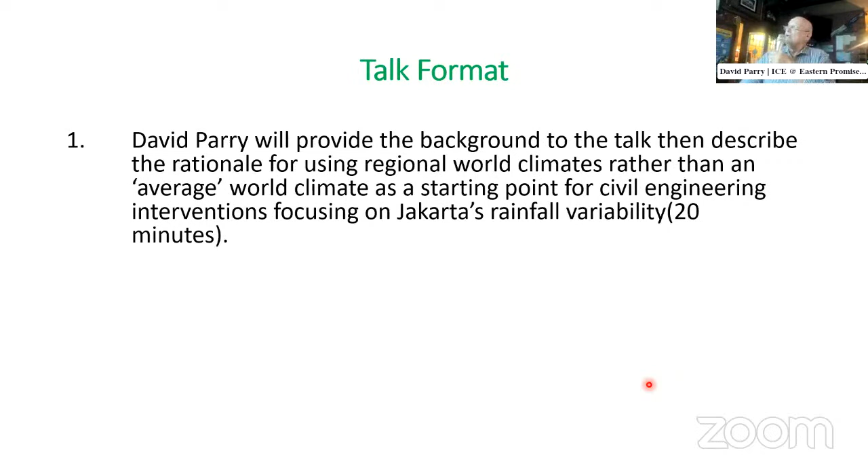Mike's already said a little bit about this, but I will provide background to the talk, then describe the rationale for using regional world climate rather than an average world climate as the starting point for civil engineering interventions. I'm going to focus on Jakarta's rainfall variability on these topics, and that will take about 20 minutes. Then David will elaborate on the use of more sustainable construction materials and engineering design initiatives for reducing the project's carbon footprint—about 10 minutes. Then a Q&A session, 15 minutes.

Now, some basic climate facts. Actually, Mike mentioned I'm going to discuss climate policy. Well, I'm not actually. That's a topic I could spend a whole lecture on. But I will do some basic stuff, which I think will be useful background for those of you who are not so familiar with this. Now, the IPCC, the Intergovernmental Panel on Climate Change, in its most recent report, states that the link between the rise in man-made GHG, greenhouse gas emissions, and the increase in global average air temperature is unequivocal.

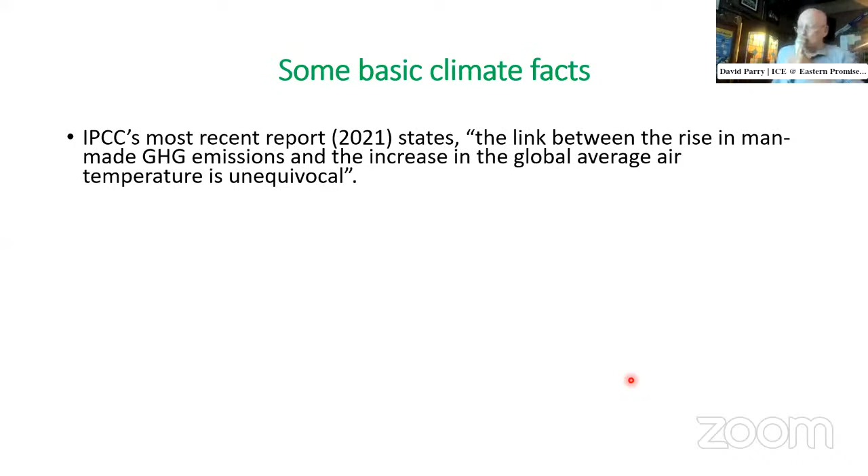Now, the main greenhouse gases include water vapor, carbon dioxide, the one we hear most about, methane, nitrous oxide, and ozone. Also, the so-called HCFCs and the HFCs. These, as you know, were identified in the 70s with the large ozone hole in the Antarctic. The chlorine in these actually attacks the ozone and destroys it. This resulted in, I'm sure many of you know, the Montreal Protocol of 1989.

Now, they phased out these CFCs, which were used in refrigerants and air conditioning units. And they were very successful. It's the most successful international treaty of this kind, compared with the Kyoto Protocol. It's still in place today. The ozone has recovered. And many of these are actually banned, particularly in the United States. We have to find alternatives.

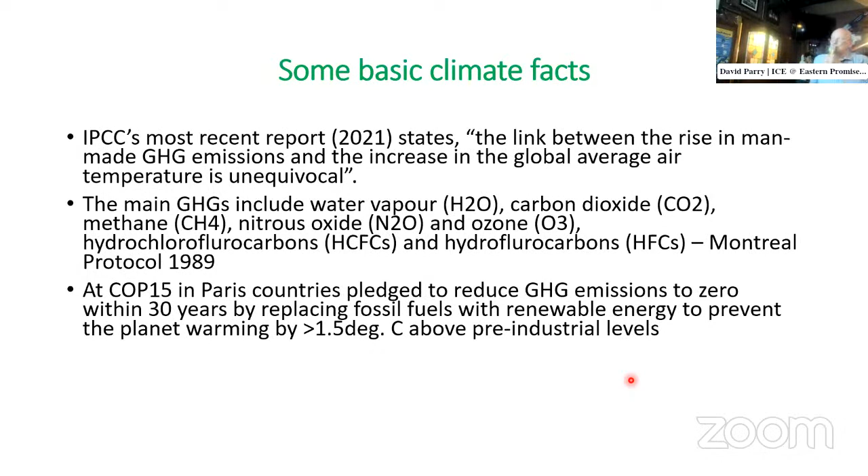Now, at COP, COP stands for the Conference of Parties, that was 2015 in Paris, countries pledged to reduce greenhouse gas emissions to zero within 30 years, replacing fossil fuels with renewable energy, preventing planet warming by greater than 1.5 degrees Celsius above pre-industrial levels. Now, to give you an idea, pre-industrial revolution, let's say 1750, the CO2 levels in the atmosphere were around 280 parts per million.

Move on to the 1950s and 1960s, it reached 310 parts per million. An 11% increase over 200 years, so nothing really spectacular there. It's about 0.06% a year. Now, by 2022, today, the level is 425 parts per million CO2. That's a 37% increase over only 70 years, at 0.52% a year. Now that's practically 10 times the previous rate. So things are accelerating, hence the concern for accelerated anthropogenic, in other words, man-made global warming.

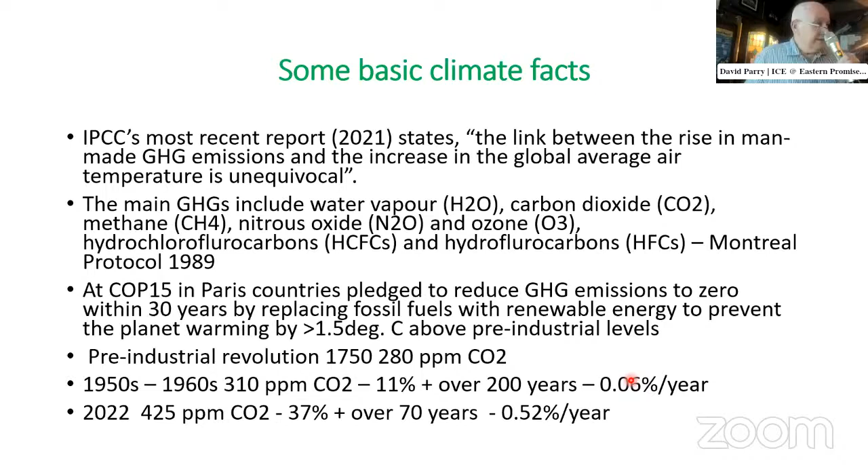Now, the main cause of increased greenhouse gas emissions is increased use of fossil fuels, coal and its derivatives, peat, lignite, the different forms of coal, from very rock hard anthracite to very soft peat and brown coal lignite. And then petrol, oil, diesel, and gas. These are used for transportation and electricity generation to power industries.

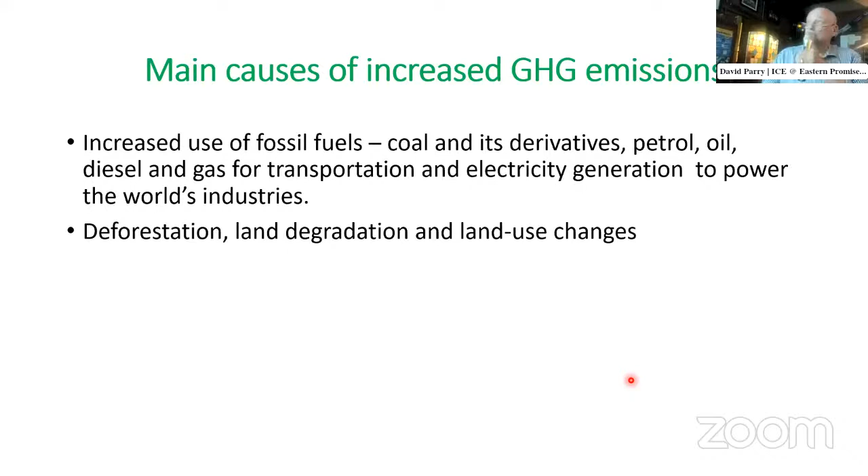Deforestation, land degradation, and land use changes. So there's been huge deforestation over the years. A lot of land is degraded, erosion, and so on. And land use changes include, once forests have been cleared, certainly in Indonesia, much of the forest is replaced with monoculture, oil palm and other crops.

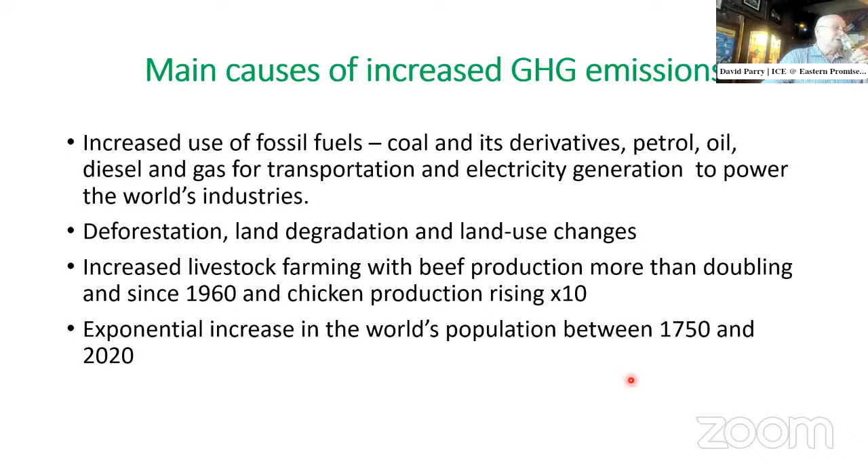Increased livestock farming, with beef production more than doubling since 1960, and chicken production has actually risen 10 times. So with increased livestock farming, of course, you get increasing amounts of methane gas, which is a much more aggressive warmer in the atmosphere than CO2, something like 27 times more. And you get competition, of course, for land, for growing food, and for grazing livestock. So there's competition all around. So this is another reason for concern about increased livestock farming. Remember, countries like Australia depend on it for their economy.

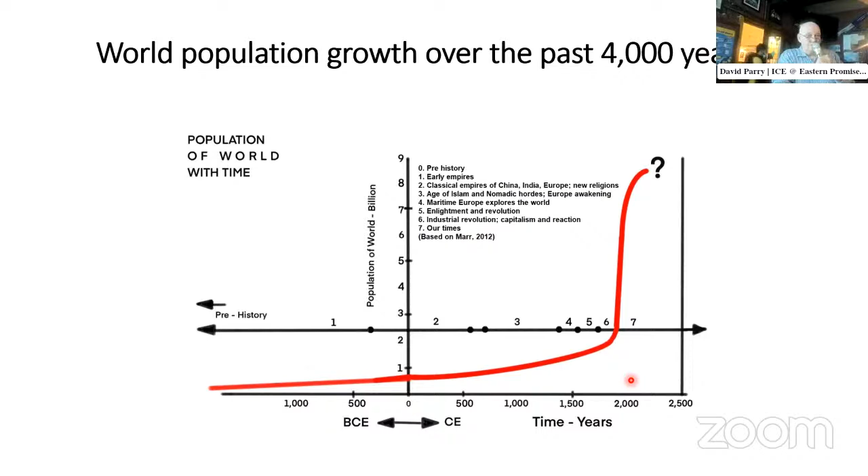So average world temperature, let's just discuss this for a moment. This is important because average world temperature is a convenient statistic for detecting and tracking changes in the Earth's energy budget. At any one time, hot and cold parts of the Earth are likely to be 100 degrees Fahrenheit, 55 degrees centigrade apart. Antarctica, Sahara Desert.

But we, as humanity, do not live in an average world, but we live in specific parts of it with different ranges of air temperature, rainfall, snowfall, and sunshine. Our long-term status of these meteorological parameters in every country and region on the planet form the basis of the science of climatology. Now, the ancient Greeks recognized 3 latitudinal climate zones in the Northern Hemisphere and 3 in the South: frigid, temperate, and torrid.

Now, since then, there have been many attempts to classify climate, most of them emanating from the 18th and 19th centuries, and probably 10 are the ones that are most used by climatologists. And of these, the Köppen-Geiger classification of the 20th century is the most commonly used and most appropriate.

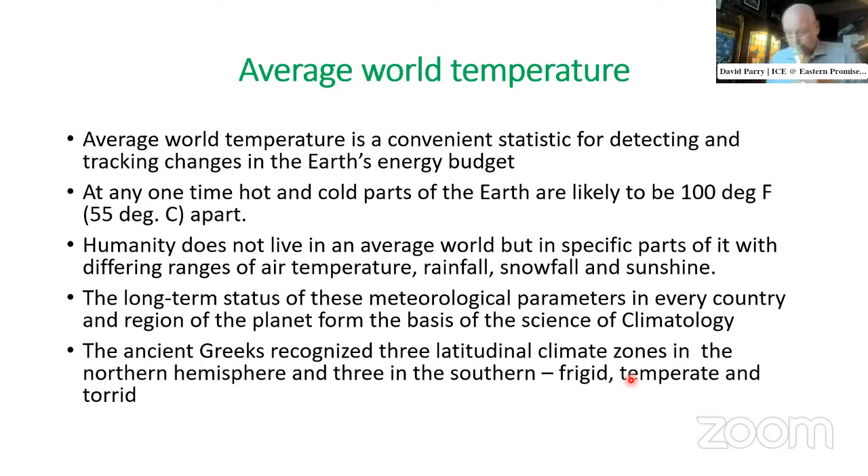This is just the ancient Greeks climate classification. Here we are, frigid zone. This is very sensitive. All over the place. There we go.

I think you can see frigid zone, temperate zone, torrid, and then this ocean river around the equator. And then it's repeated in the torrid zone, temperate zone, and the frigid zone. I'm afraid they got north, south, east, and west a bit mixed up in this diagram.

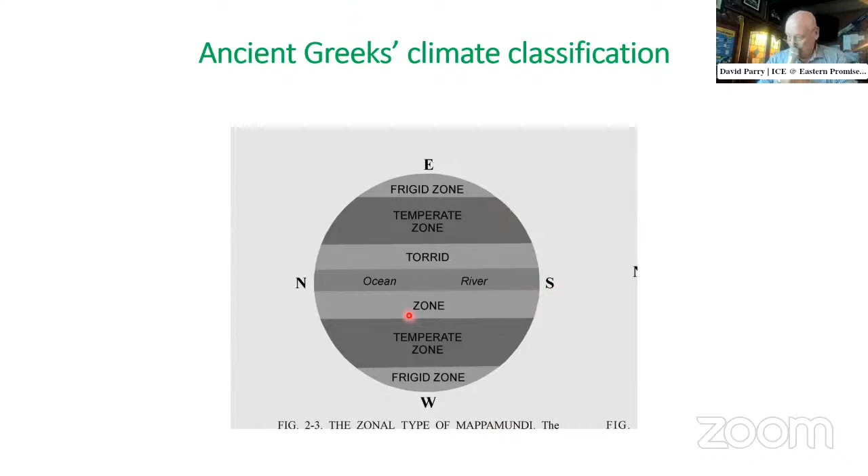So the Köppen-Geiger climate classification breaks the world down into 5 basic climate types. A, which is tropical, equatorial. B, arid. C, temperate. D, continental. And that last one actually is polar. So not too far removed from the ancient Greeks. There's a little more in there. We're, of course, in Indonesia.

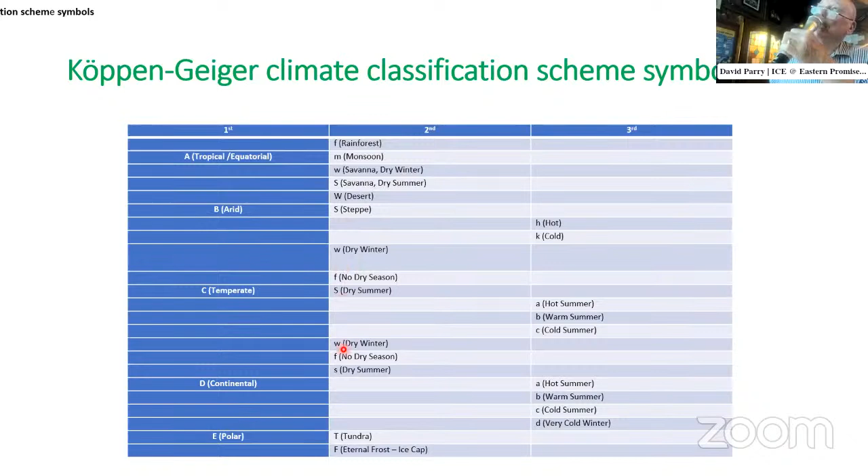We're part of the tropical equatorial climate with these symbols: F for rainforest, M for monsoon, W savanna dry winter, S savanna dry summer, and then you've got desert climates, steppe climates, and so on.

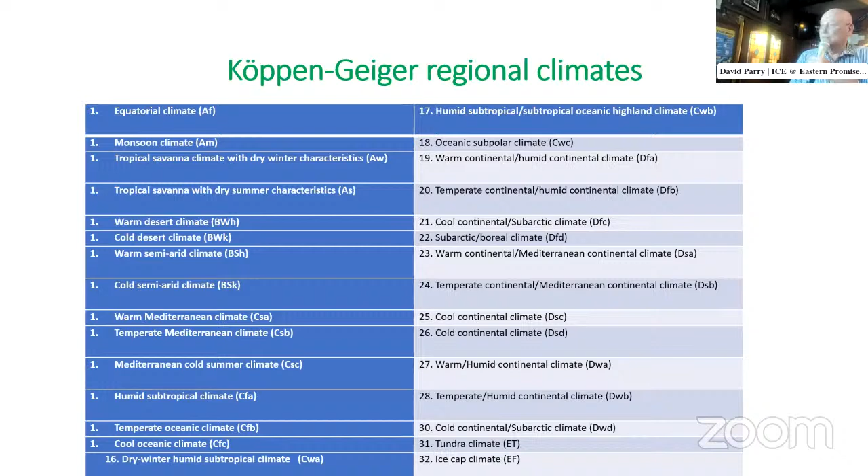Now, under the Köppen-Geiger system, they recognize 32 regional climates throughout the world. And there are subclimates within each. But again, probably something went wrong in this column. Everything's number 1. It should be 1 to 16, and then 17 down to 32 is the last one. Get it on the screen.

This is what it looks like on a map. Again, you can see Indonesia is all in the blue: Af, Aw, and Am categories. The desert climate, red, Africa. I think I'll give up on this pointer, useless.

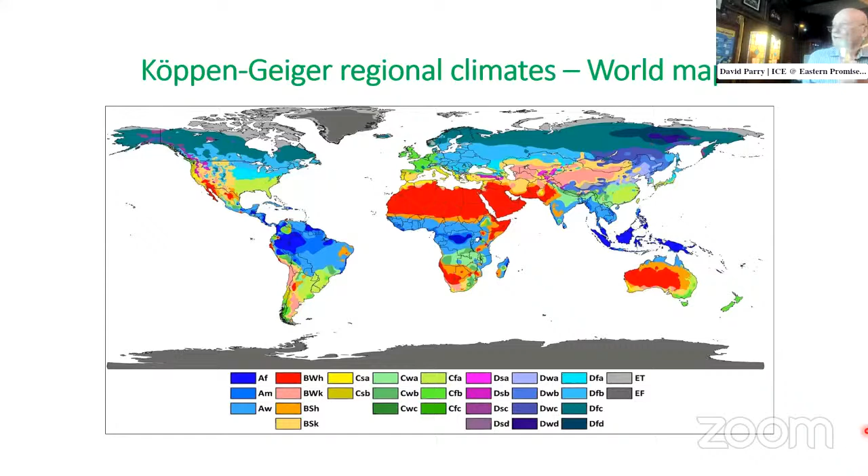So an average temperature of 3.5 degrees C, with lows of minus 37 degrees C or even below. While I was there, I experienced minus 37 and even more. It's a cold continental climate, dry, and very cold.

So the climate models, predicting the worst case scenario anyway, say by the end of the century the average world climate would increase by as much as 6 or 7 centigrade, but most models are saying probably around 3.5. So an increase in average surface temperature by 3 degrees for a place like Nur-Sultan for the second half of the 21st century will bring the average temperature up to 6.5 degrees. It's still pretty damn cold.

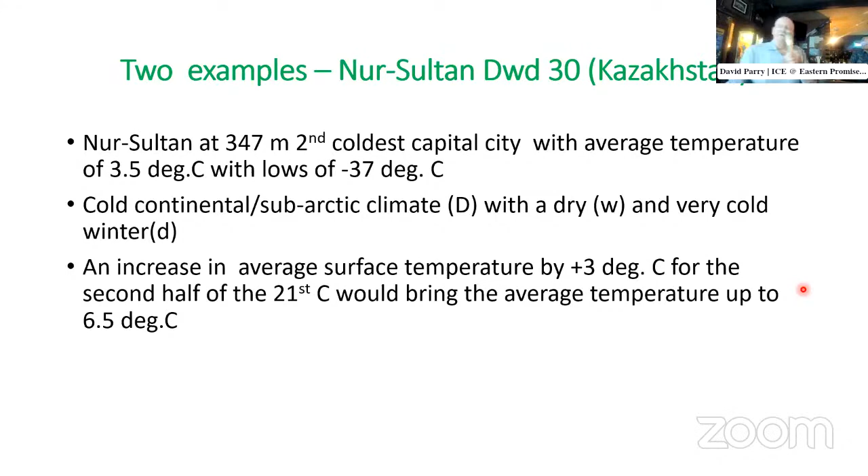But it would make life a little bit easier for the people who live in Nur-Sultan. The ground is frozen for 5 to 6 months of the year. So with that 3 degree centigrade increase in average temperature, the ground would be frozen for less time, and it would result in some improvements in their agriculture, timing, and use of power for cooling and for heating.

Now, the other example is Asmara. Asmara is the capital there in Eritrea. I worked there in 1970 for a short period. Very beautiful city. It's at 2,325 meters. It has a tropical savanna climate with a dry winter, so it's Aw, and a mean annual temperature of 17.1 degrees centigrade. An increase in average surface temperature by 3 degrees centigrade for the second half of the 21st century

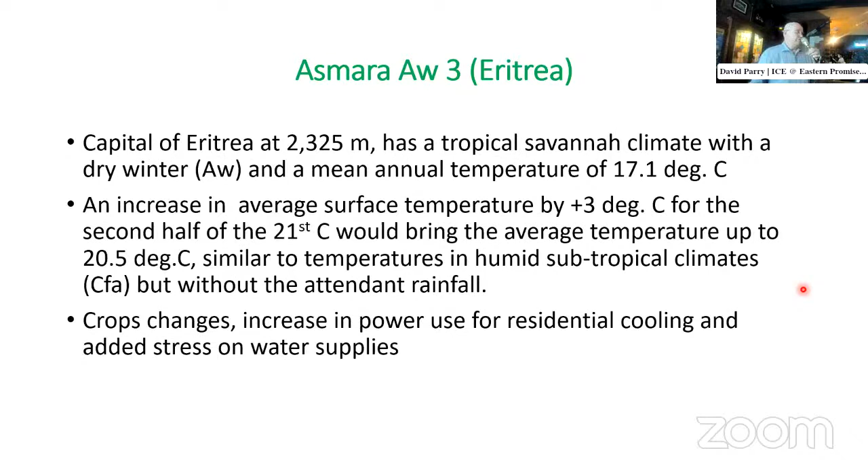would bring the average temperature up to 20.5 degrees C, similar to temperatures in humid subtropical climates, Cfa, but without the attendant rain. Now, this will cause crop changes, increase in the use of power, residential cooling, and added stress on water supply. So those are just two reasonably extreme examples of what predicted climate change could do.

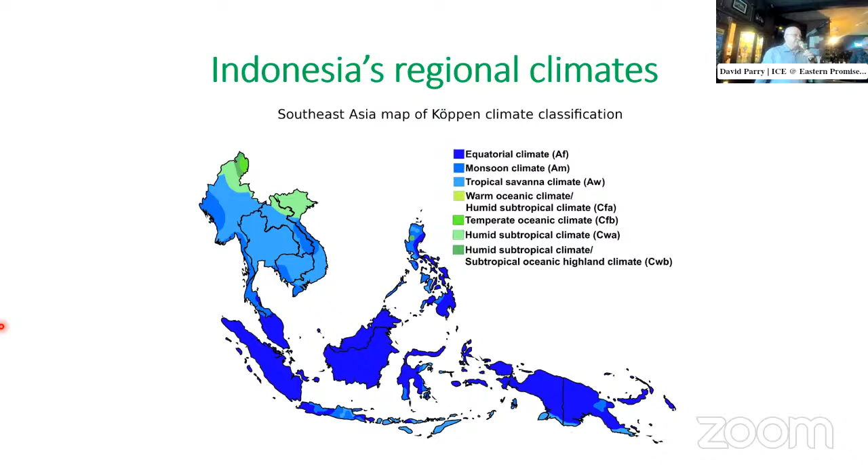Right. Now, we're concerned mainly here with Indonesia. So Indonesia's regional climates, as mapped by Köppen, are equatorial climate, monsoon climate, the blues there, a little tropical savanna climate in some areas, and up in not Indonesia, but in Southeast Asia, Vietnam areas, you've got the temperate oceanic climate. But we're concerned with Indonesia, and within Indonesia, within, I would say, three subclimates, you have a huge variety, as many of you have experienced.

Now, one of my hobbies has been collecting daily rainfall data with a rain gauge in my garden. I started in 1992. I'm still taking them, but for the 30-year record, I finished officially on December 31st, 2021. Now, in the analysis, when you look at the climate stations in and around Jakarta, there's Tanjung Priok, then Soekarno-Hatta, South Tangerang, Halim, and then my gauge at Lebak Bulus. And for comparison, to put everything in context, I've got figures for Bogor.

So 30-year records, these are the World Meteorological Organization codes for those stations. These are the positions of those stations, and this is their altitude above mean sea level: 3 meters, 11 meters, 22 meters, 28 meters, 47 meters, and the Bogor station 207 meters. Now look at the range of rainfall. 1,815 millimeters averaging at Tanjung Priok over 30 years. Soekarno-Hatta 1,658 since it was opened. And then in South Tangerang, 2,265 over 30 years.

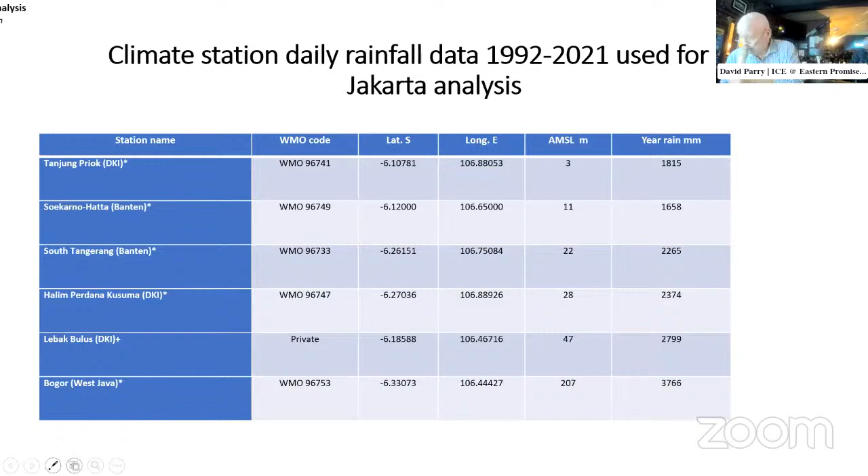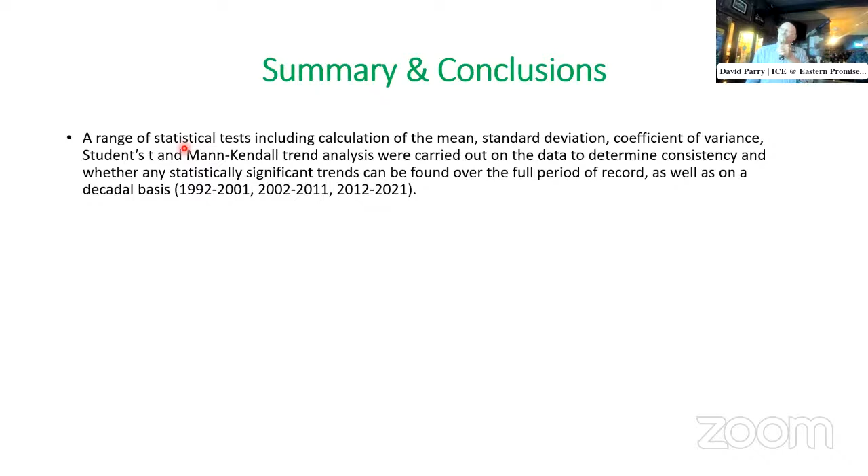Then Halim, 2,374. My rain gauge, 2,799. And then the Bogor one, 3,766. So that's quite a huge range of rainfall averages. So, what can we say about this? These data were subject to a range of statistical tests, including the mean, standard deviation, coefficient of variation, Student's t, and Mann-Kendall trend analysis, to determine consistency and whether any statistically significant trends can be found over the full period of record, as well as on a decadal basis: 1992 to 2001, 2002 to 2011, 2012 to 2021.

So the analysis reveals the existence of 3 consistent and well-defined annual rainfall zones over DKI Jakarta that differ significantly from each other by between 500 millimeters and 984 millimeters over a city whose area is only 626 square kilometers. Now that's quite remarkable. I would challenge any city in the world to come up with such rainfall variability within its city limits.

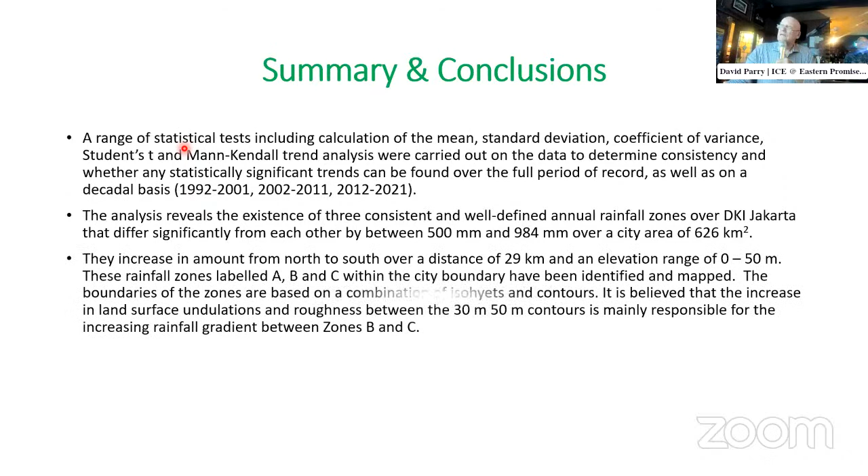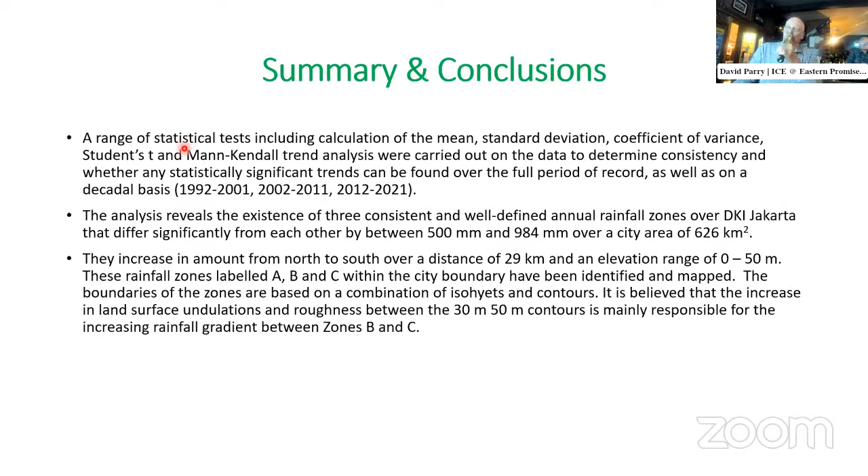The rainfall increases in amount from north to south over a distance of 29 kilometers and an elevation range of 0 to 50 meters. These rainfall zones, which I've labeled A, B, and C, have been identified and mapped. The boundaries of the zones are based on a combination of isohyets and contours. It is believed that the increase in land surface undulations and roughness between the 30-meter and 50-meter contours is mainly responsible for the increase in rainfall gradient between zones B and C.

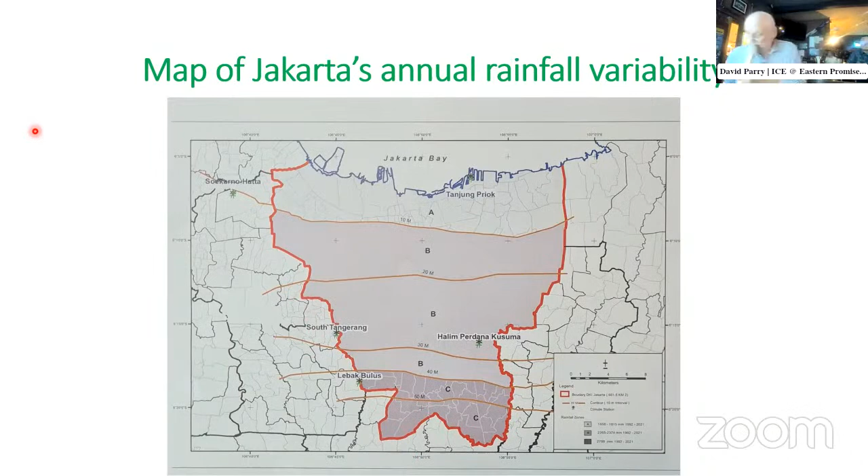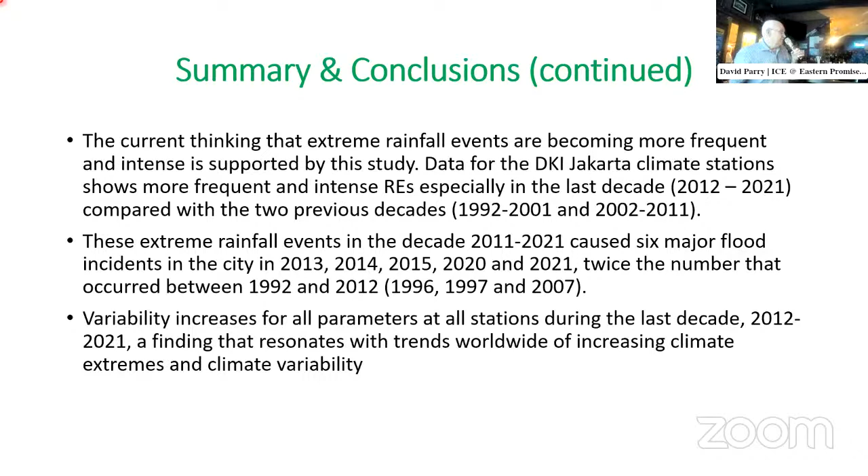Now, for Jakarta, this is where the challenge begins. Well, in 3 distinct rainfall zones, when you are designing for your different types of infrastructure, the flooding, the housing, the roads, which do you use? Do you use all 3? Do you use a specific one for the zone which your project's in? This is something that is a challenge for civil engineers to work on.

Now, this is the last few minutes, how are we doing?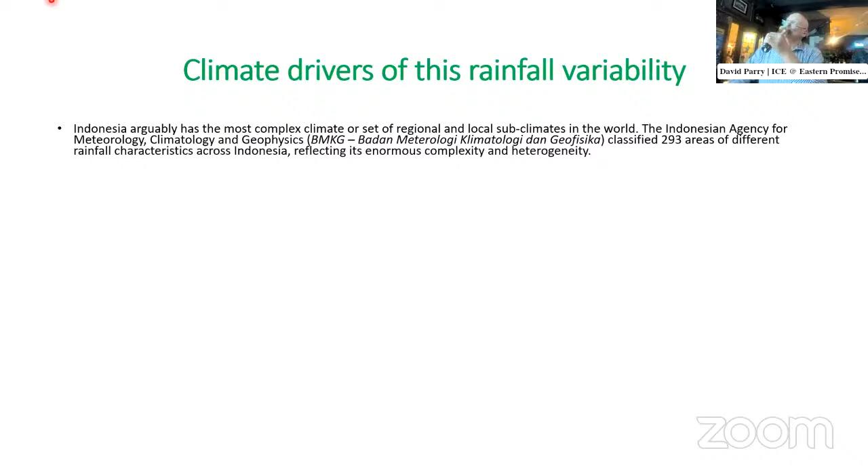Perfect. Okay. Well, climate drivers of this rainfall variability. Now, Indonesia arguably has the most complex climate or set of regional and local subclimates in the world. The Indonesian agency, the BMKG, Badan Meteorologi, Klimatologi, dan Geofisika, classified 293 areas of different rainfall characteristics across Indonesia, reflecting the enormous complexity and heterogeneity.

Now, climate variability in Indonesia is affected by global, regional, and local climate dynamics, including, of course, the Asian monsoon, which you will all learn about at school, and which caused the terrible floods in Pakistan. The ITCZ, the intertropical convergence zone. This is the continuous belt of low pressure either side of the equator, where the trade winds of the northern and southern hemispheres come together, the southeast trades, the northeast trades. Those of you that watch the weather forecast, you'll always see this belt either side of the equator with cloud ringing the globe.

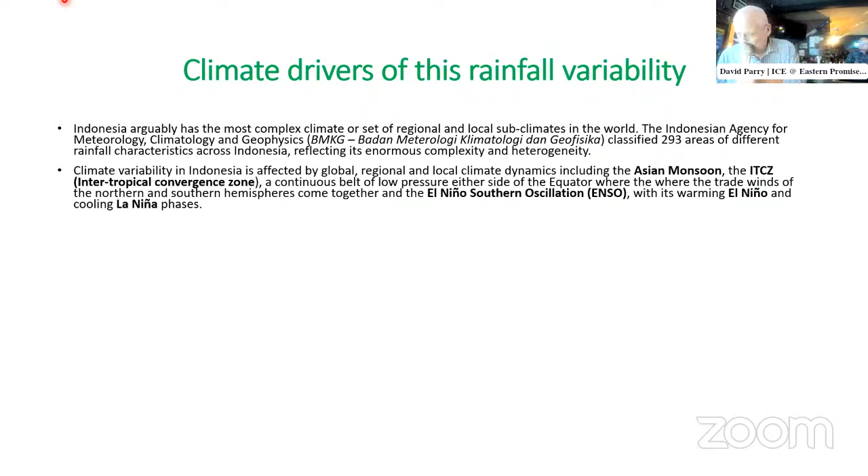And of course, we've got the so-called El Nino Southern Oscillation, or ENSO, with its warming El Nino and cool La Nina phases. Now, in addition to that, we have a thing called the Indian Ocean dipole, also known as the Indian Nino. It's an irregular oscillation of sea surface temperatures in the western Indian Ocean. It becomes alternately warmer, the positive phase, and then colder, the negative phase, than the eastern part of the ocean. The positive phase is associated with drought conditions, and the negative with high rainfall in parts of Australia and Indonesia.

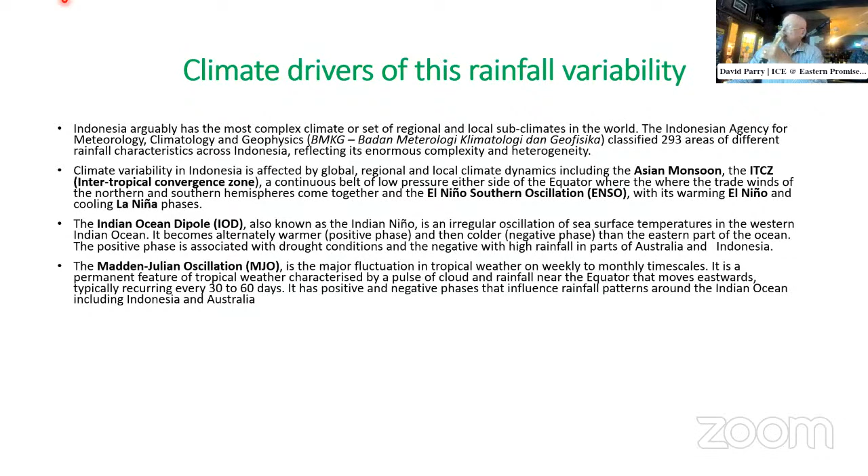Then you have another phenomenon called the Madden-Julian oscillation, the MJO. This is a major fluctuation in tropical weather, which occurs on a weekly to monthly timescale. It's a permanent feature of tropical weather characterized by a pulse of cloud and rainfall near the equator that moves eastward, typically recurring every 30 to 60 days. Again, it has positive and negative phases like the IOD, that influence rainfall patterns around the Indian Ocean, including Indonesia and Australia.

Then local meridional Hadley circulation and the more zonal Walker circulation change in each phase of the oscillation, causing enhanced or suppressed convection over Indonesia. Finally, you have local scale diurnal sea and valley breeze circulation, and of course, orographic rain. So you add all this lot together, and you realize just how complex the climate of Indonesia is.

And with such complexity of the atmospheric mechanisms creating the weather patterns over Jakarta and Java Island, separating the major drivers of weather from those with less impact is very difficult. And of course, it's way beyond the scope of even the paper I wrote here, certainly the scope of our discussion. I just put this down because some of you may know of these things, and I think it would be useful for you as a synopsis of these major drivers.

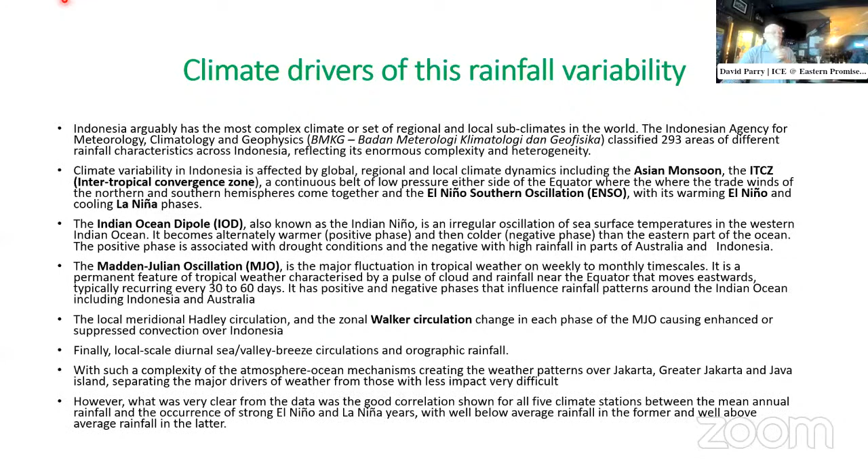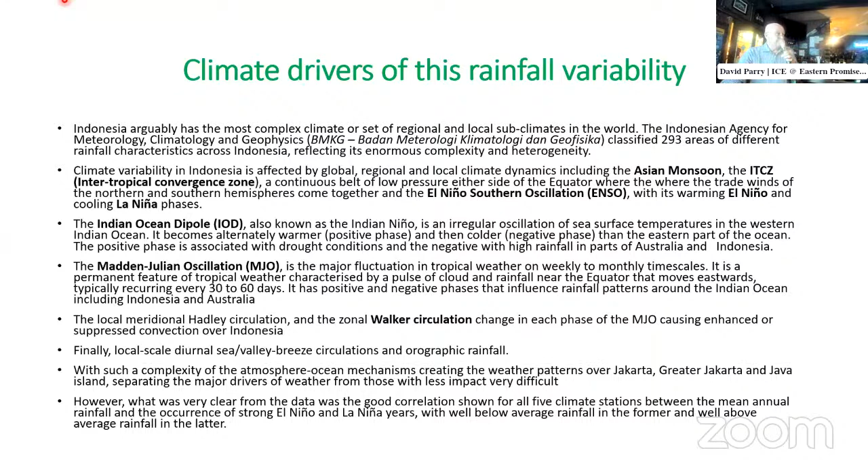But with Indonesia, the data that I had did reveal that there was clear, good correlation shown for all 5 climate stations between the mean annual rainfall and the occurrence of strong El Nino and La Nina years, with well below average rainfall in the former and above average rainfall in the latter. This is just a quick shot of the intertropical convergence zone. See the northeast trades bending, moving westwards, southeast trades coming in south, again bending, moving westwards.

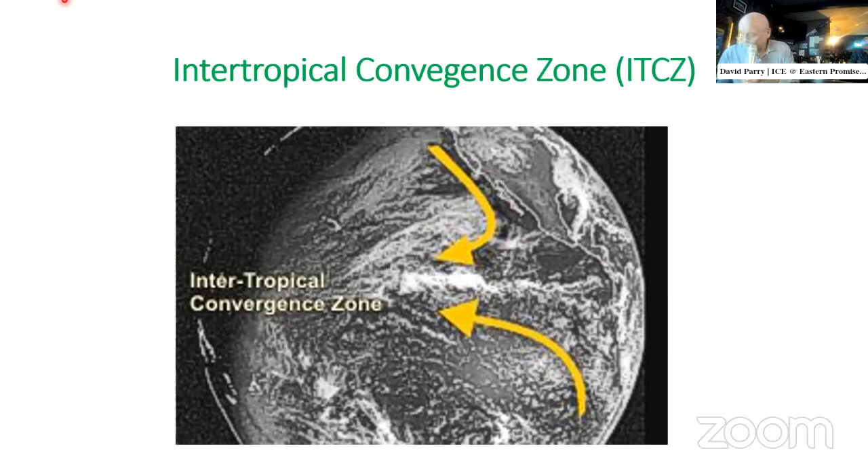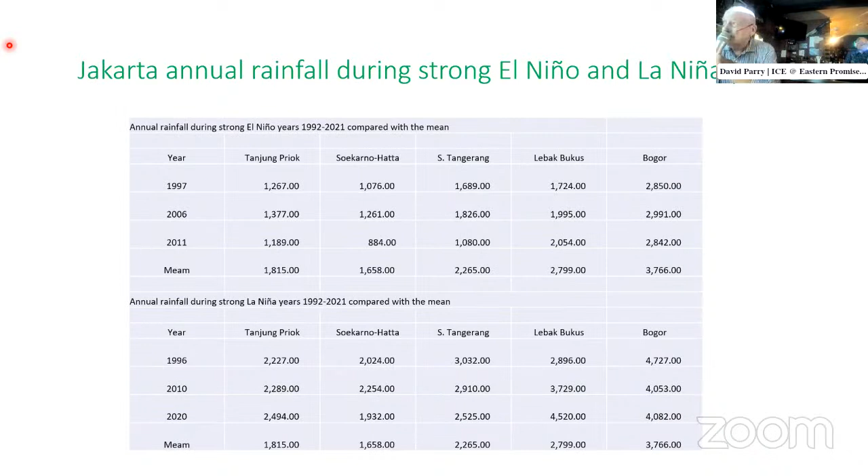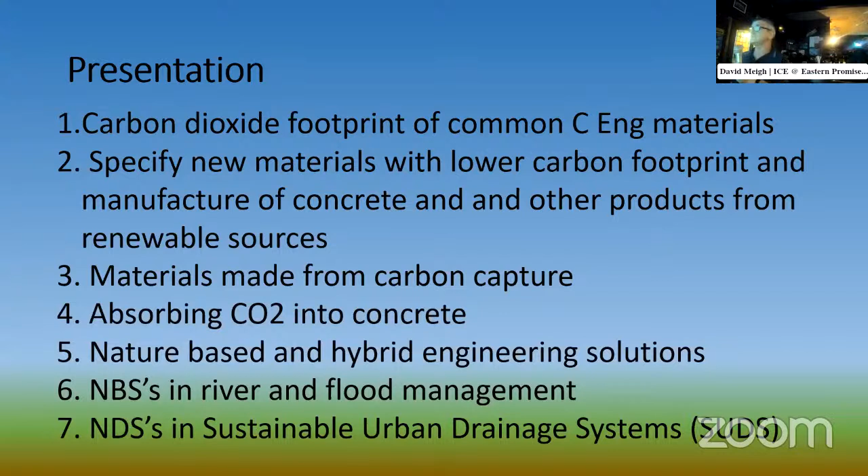And then river management and flood management using nature-based solutions. And then nature-based solutions in sustainable urban drainage systems. So 6 is really about more rural areas and the sort of irrigation areas we have in Indonesia. And 7 is about the cities, where an awful lot of people are moving these days, emphasized by the first picture.

So the carbon footprint of manufacturing engineering materials, starting with steel. Steel on average emits 1.85 tons of carbon dioxide, equal to about 8% of global CO2 emissions. That's to produce 1 ton of steel.

So that includes not only mining the ore, but also transporting it to the steel factory, and then once you've got it there, refining it, usually with either coal or electricity made from coal. So it's a huge contribution. Perhaps we should think about whether we can either make steel in a better way, or find an alternative to steel.

Ordinary Portland cement used in concrete produces 0.62 tons of carbon dioxide per ton of cement, which is also a lot. So we need to look at a way of producing cement with less carbon dioxide.

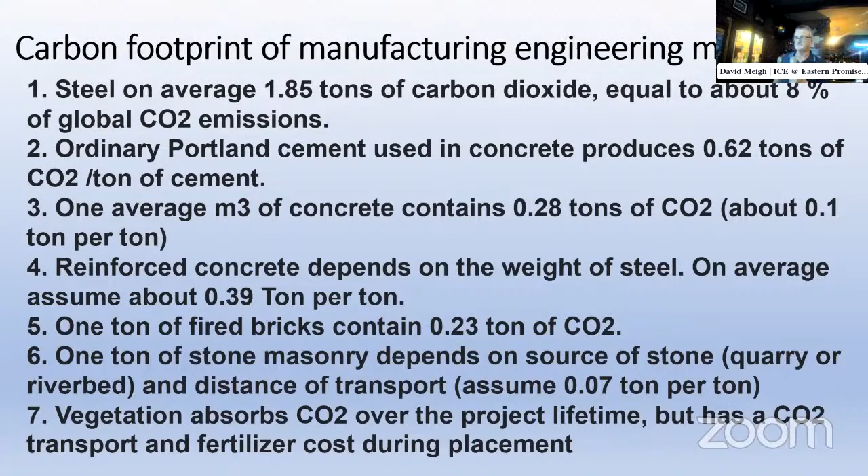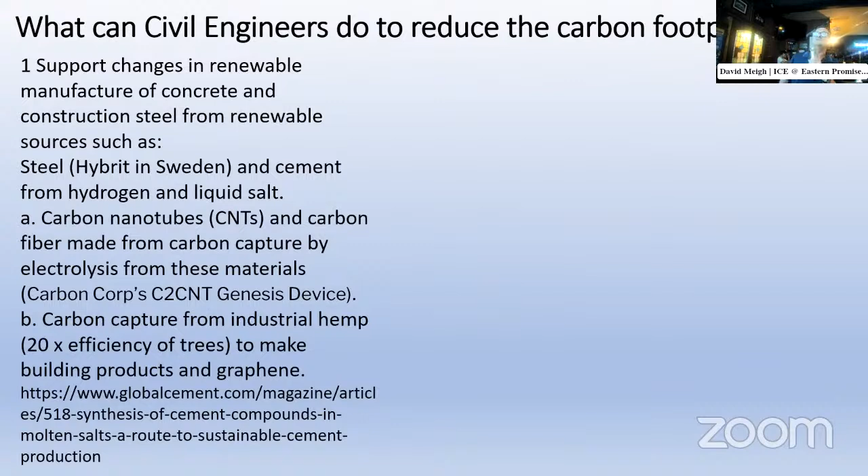So what can we do to reduce our carbon footprint? Support changes in renewable manufacture of concrete and construction steel from renewable sources.

I understand this new prototype factory in Sweden is making cement from hydrogen and from liquid salt. I'm not quite sure what liquid salt does, but liquid salt can also be used in cement manufacture as a heat source instead of coal or gas or whatever you burn to heat up the cement components.

Moving on from steel made with hydrogen, which probably reduces emissions down to about 50%, there's carbon nanotubes, CNTs, and carbon fibre made from carbon captured by electrolysis, and materials made from these.

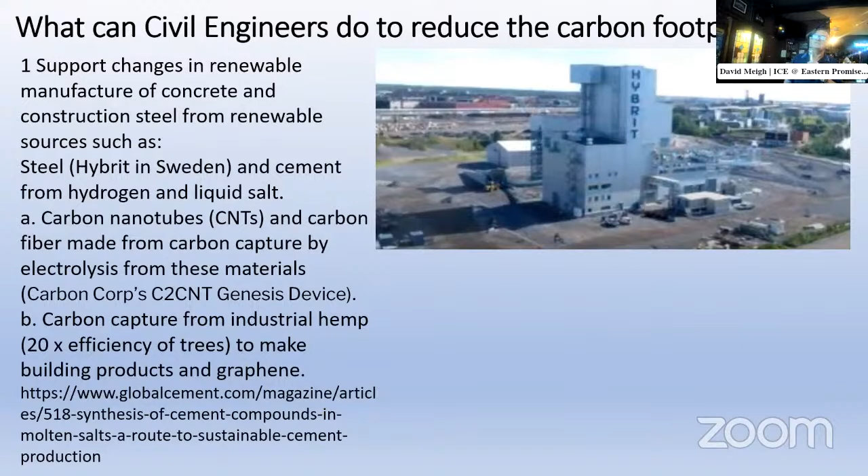There's a Canadian company called Carbon Corp making something called the Genesis device. If I click down here, we should come up with the Alberta Carbon Conversion Technology Centre - they're developing a system for making carbon fibres from captured carbon dioxide.

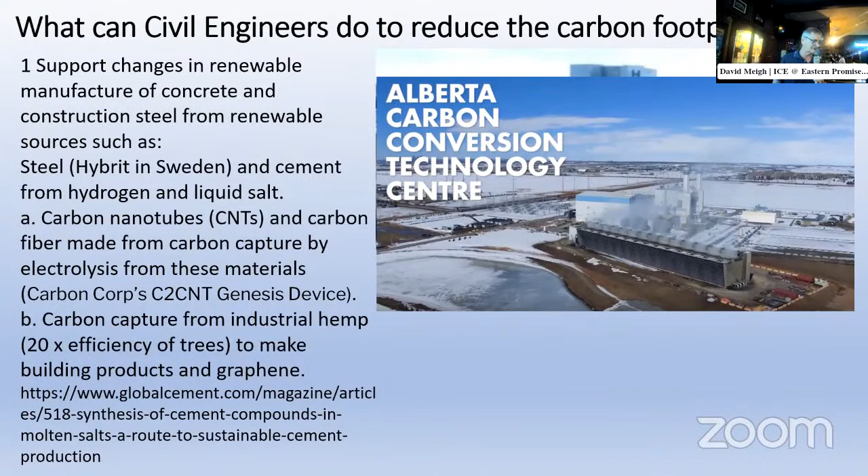They show how they combine CO2 and air in this electrolysis system with a carbonate in the center, and it produces oxygen and carbon. So it strips the oxygen out of the carbon dioxide and produces these nanotubes as fibers or rolls of fiber or strands that can be woven together into a dark material we can use for reinforcement.

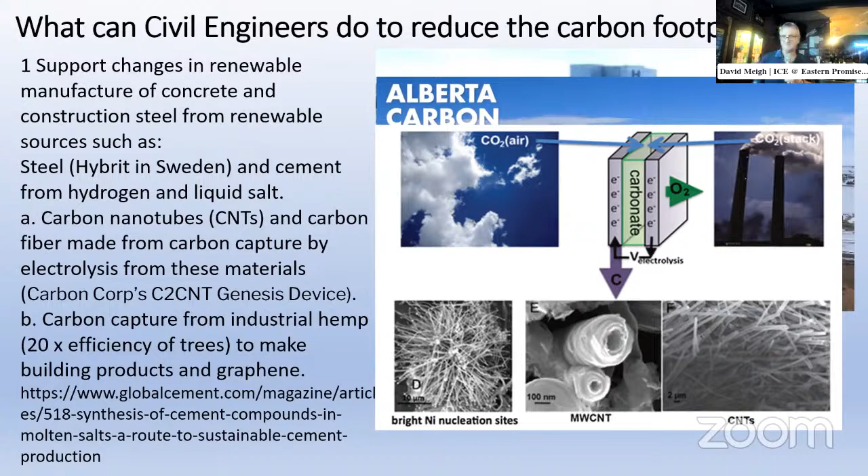And thirdly, this is another way of capturing carbon in a greenhouse using industrial hemp. It looks very much like, and it's very related to a product that some people like smoking, but actually industrial hemp has very little of the part used by that sort of person - it's used as a material.

It's 20 times more efficient at capturing carbon than trees are. So grown in a very long greenhouse where you feed in the carbon dioxide, say from a coal-fired plant or a steel plant - not so much when it's young, but once it starts to grow, it captures carbon very quickly. We can use the fiber from this material for all sorts of construction projects, which I'll show in a second.

This material can also be used to make graphene. There's a company in Canada also making graphene from this material. I'm not quite sure what the process is - I put the internet link down at the bottom.

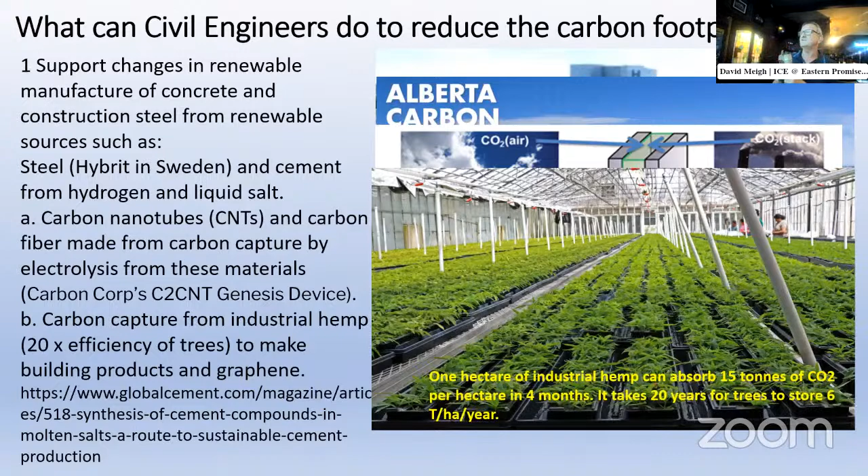Let's look at this: 1 hectare of industrial hemp can absorb 15 tons of CO2 per hectare in 4 months, whereas trees take 20 years to store 6 tons per hectare. So you can see there's a huge difference in just 1 year - hemp can capture 15 tons of CO2, if not twice a year.

Now I just want to show you some of the materials that are made. Carbon fiber and graphene made from the electrolysis of captured carbon allows steel rebar to be replaced in reinforced concrete with carbon fiber reinforced polymer, CFRP, rods.

Here you can see the rods used for reinforced concrete instead of steel. So in the future we'll be able to build reinforced concrete without steel reinforcing rods. On the right hand side you can see a beam made of carbon fiber instead of a steel beam.

In the center here there's a picture of carbon fiber mesh made for thin panels and floor slabs. I'll show you something made from these a bit in the next slide.

For existing structures that perhaps have started to age and crack, we can reinforce them with carbon fiber CFRP panels. And then on the right-hand side is a picture of what's called hempcrete, industrial hempcrete.

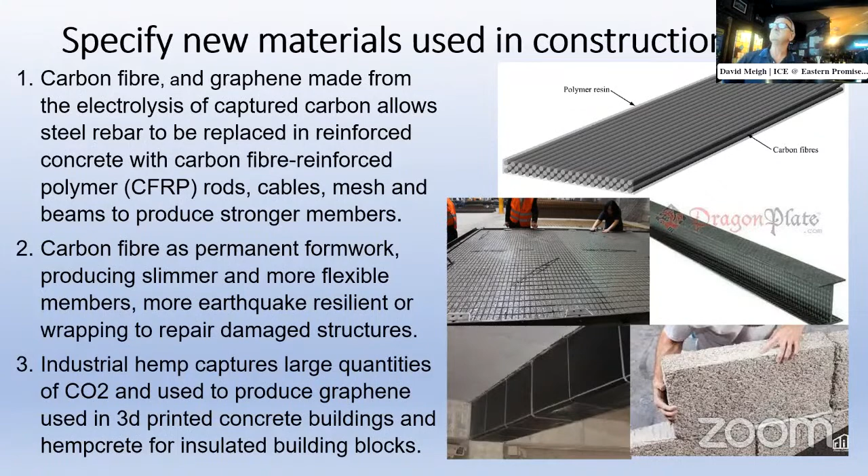So this is a very spectacular architectural roof made from hempcrete. This version of hempcrete must be impermeable, but it's quite a stunning photograph.

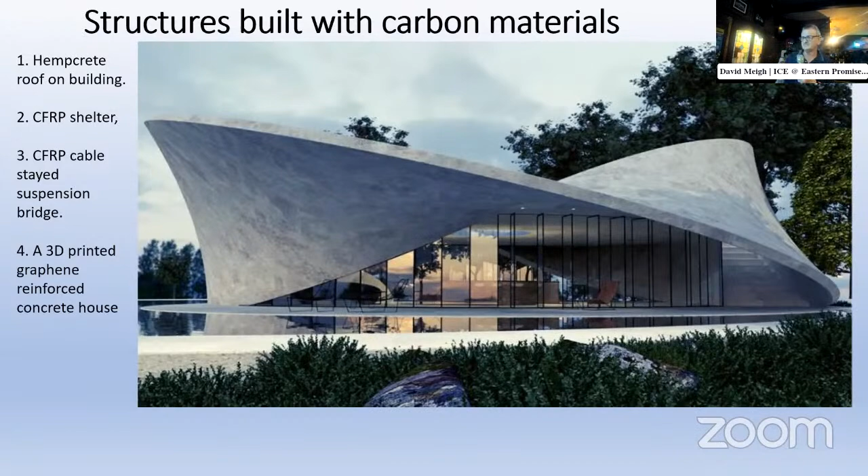This is, I think, some sort of bus shelter made from carbon fibre reinforcement. You can see how narrow the member is - you can make it far thinner than reinforced concrete. Perhaps this is just 5 centimeters thick. So it's become a very flexible architectural material.

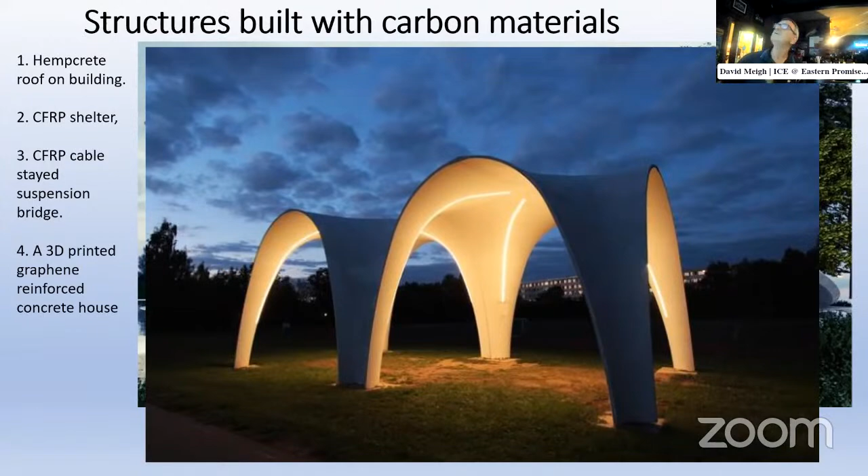And here's a bridge made from the same carbon fibre reinforced polymers. I'm not quite sure where it is, but you can see it's quite a versatile material that hopefully civil engineers in the future can specify. It may take a little time for these materials to come to Indonesia, but it's worth our engineers here keeping an eye on these materials and seeing when they become available.

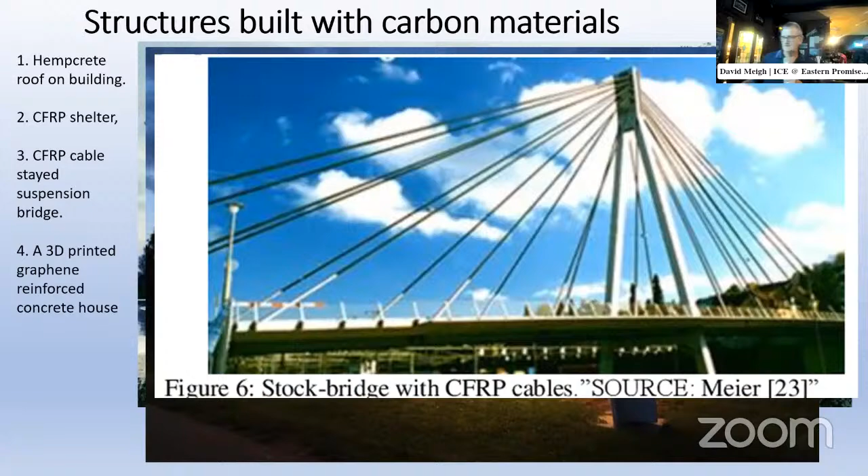This shows a 3D printed house made with graphene reinforcing the concrete instead of steel. Apparently you can make a house for about $6,000 or $7,000. You just need to get the land, bring the equipment and the right company, and help design the house, and they just print it straight off like this. You see the gaps in the walls are for the insulation.

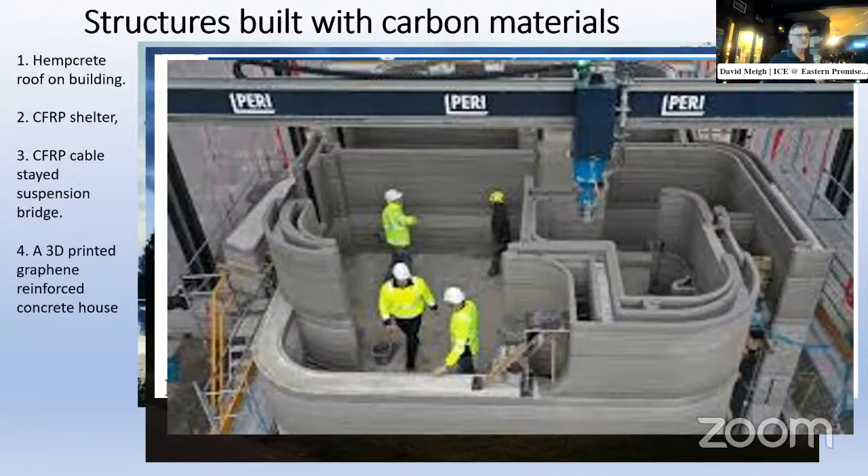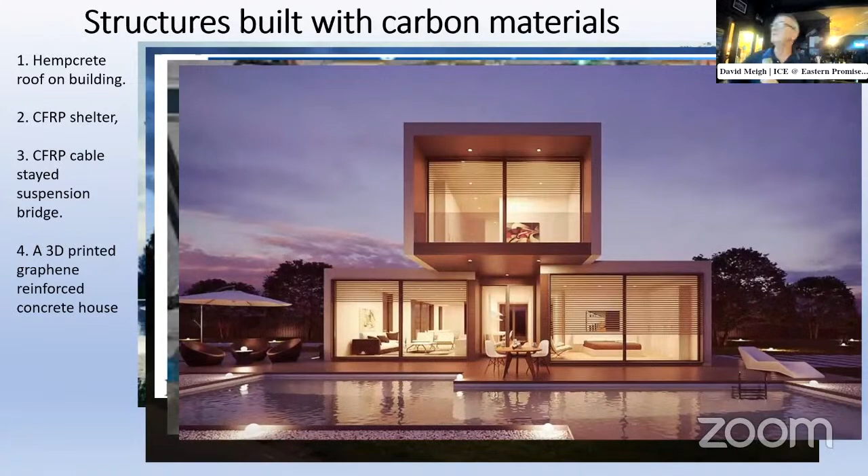And this is quite a spectacular house built from 3D printed graphene concrete. So if we move on, we can then inject carbon dioxide into concrete.

It doesn't stay as carbon dioxide. You inject very small bubbles of it, nano-sized, and it produces calcium carbonate, which becomes embedded in the concrete. This makes the concrete stronger, enabling mix optimization while eliminating the CO2.

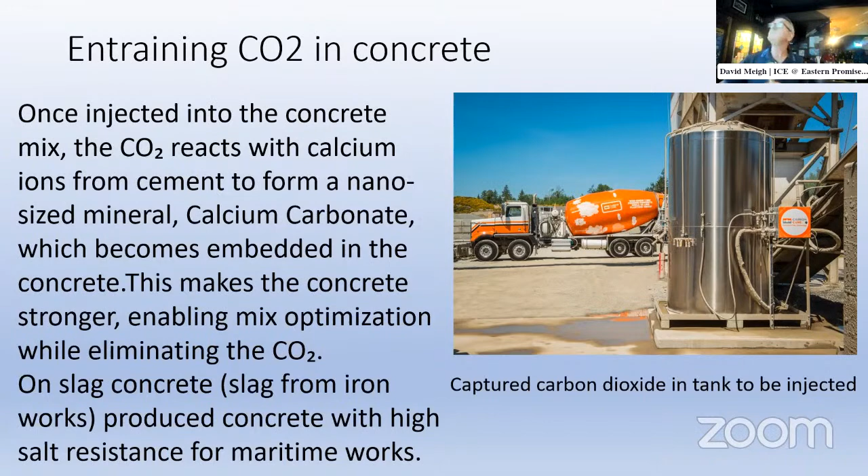Now I want to talk about nature-based and hybrid engineering solutions, because this is something that Indonesian engineers, particularly those working in drainage and flood protection and irrigation, can use a lot of.

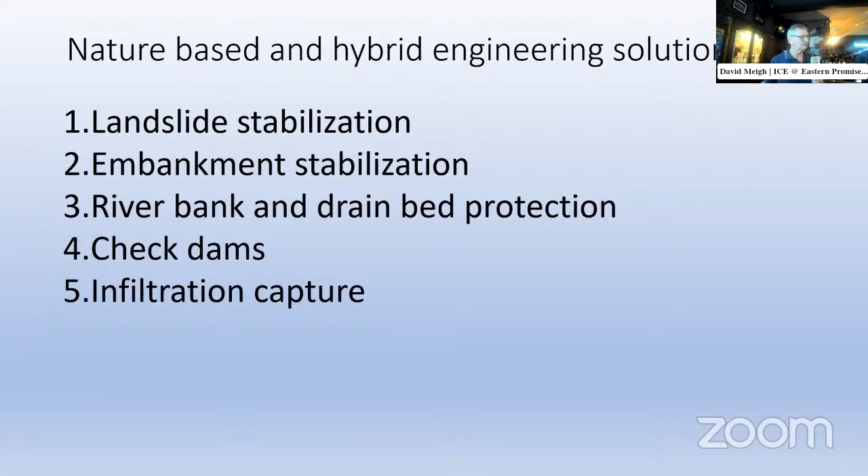First of all, talking about landslide stabilization - if you look around the hilly areas of Indonesia, you see a lot of landslides. It's a very big risk, so stabilizing them and making them productive in terms of capturing water and holding back water from flooding is important. Also, embankment stabilization, riverbank and drain bed protection, check dams, and infiltration capture, particularly in cities, is very important, because cities in Indonesia have a terrible problem dealing with intense rainfall, particularly if there's a river running through them that has high flood levels.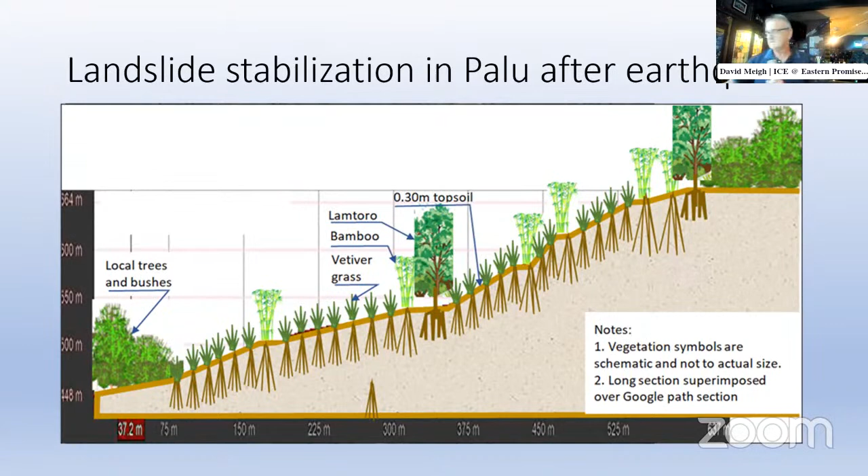Now this, I don't know, might be - this was what I proposed for a liquefaction landslip in Palu, where they proposed a geogrid, and so I said, well, perhaps to grass the surface, we could also use vetiver to make a three-dimensional grid to hold the soil.

Unfortunately, the local consultants changed it to filter material, which doesn't have holes where the roots can go through. So I had to slightly modify it and use less vetiver grass and put in ordinary grass, stoloniferous and rhizomatous grass. Stoloniferous grass is where the plant projects on the surface and then pops up the next plant, and rhizomatous is where it goes through the soil and then pops up the next bit of grass.

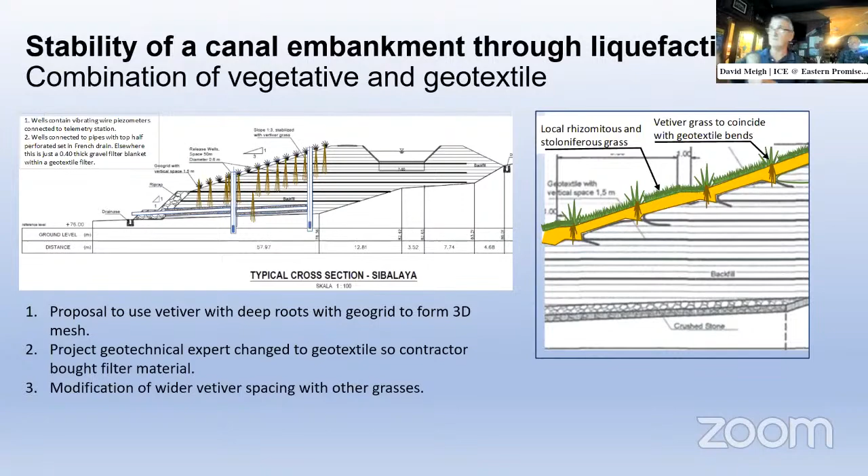So this was a combined solution between a manufactured geotextile and a nature-based solution. And I think where you have severe situations, it's good to combine the two. In fact, vetiver grass, you can design it - they've done tests on its tensile stress, so you can combine it in a physical calculated design.

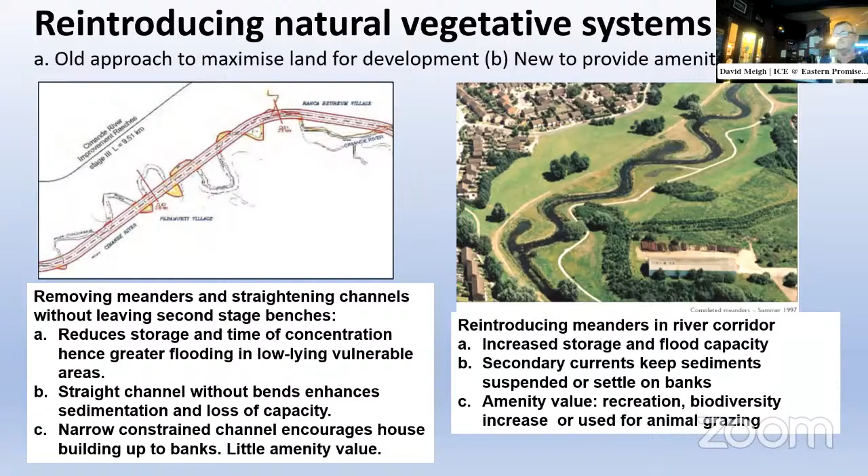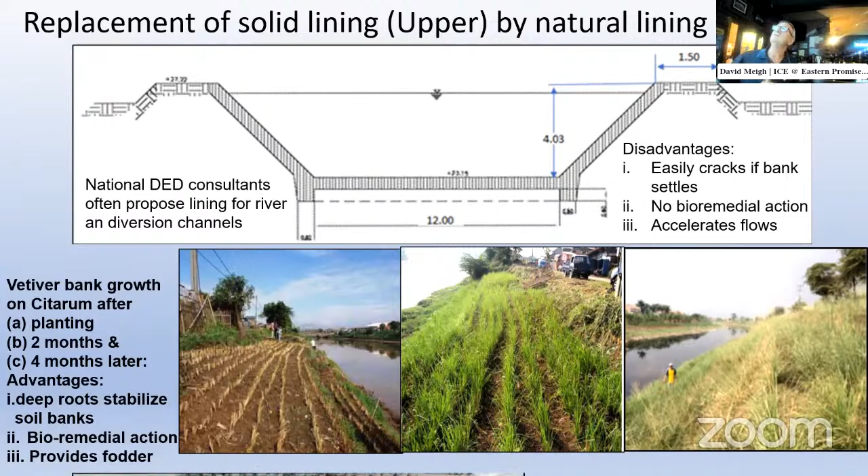Now, not only national consultants - this is a national consultant from Japan that's designed this completely lined channel here and straightened it from the original sinusoidal channel. Down below is part of the Citarum River, where there's been an experiment to plant vetiver grass.

You can see on the left-hand side the vetiver grass once it's been planted, and then in the center after 2 months, and then on the right-hand side after 4 months, you can see it's covering the whole slope. And this grass also has a bioremedial action, so we know how dirty the Citarum River is, but this grass is helping to clean it up, hopefully.

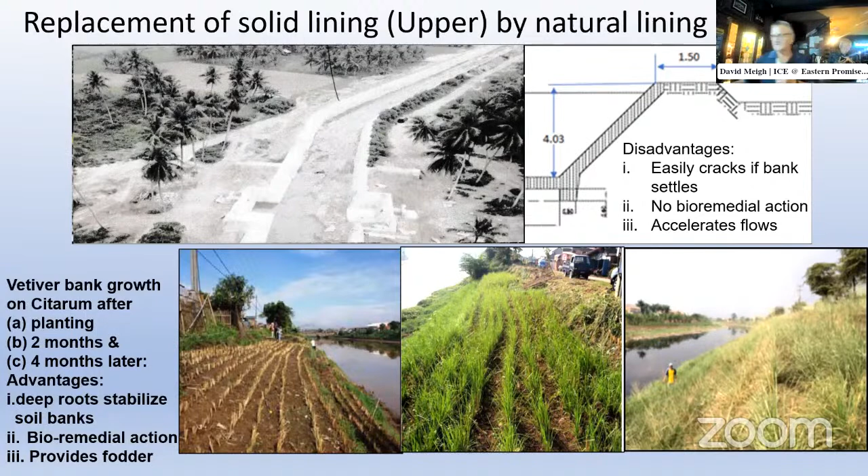Although you can see the river is still a bit of a dark black color, and these deep roots stabilize the soil banks. And actually, when it gets very high, they can be cut down and used as fodder for the local farmers, for the local husbandry. So it has other uses.

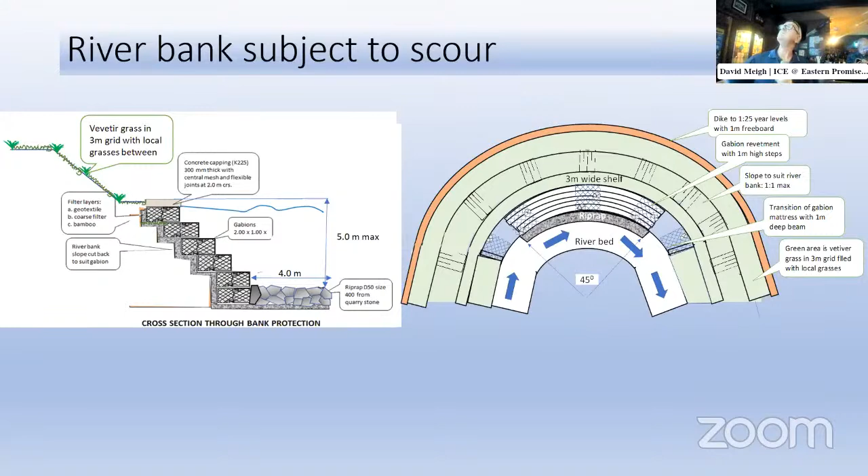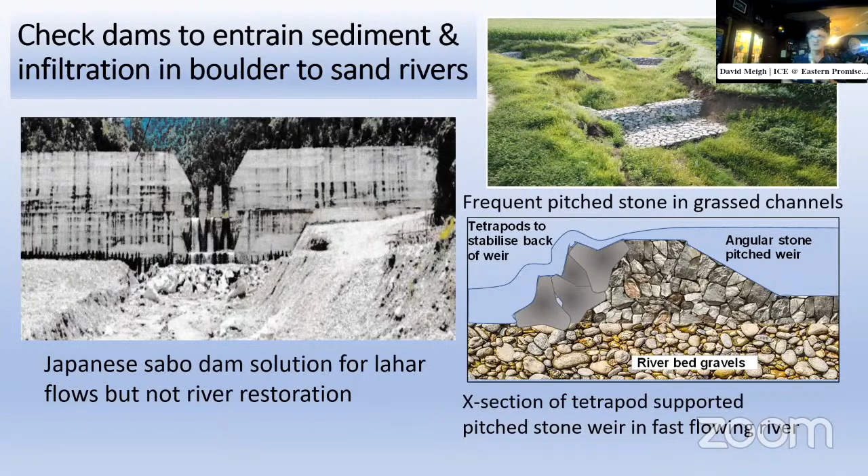So you would use tetrapods here and then natural or quarried stone here. But in the photograph above, you can see how well the grass has been established, and the velocities that now come through the river are sustainable by the grass surface. The grass is not going to get eroded away because the drops are taken by the drop structures. So this is another, in a sense, a nature-based solution rather than a huge, great concrete dam.

And here I'm showing sustainable urban drainage systems that are known as SUDs, and these are very common in Europe. So it's a very common practice to try to get rainfall to absorb into the groundwater very quickly to ease the floods in the river. It's something that needs to be introduced into Indonesia because so many of the cities here are very susceptible to flooding. And as I said, when you get very heavy rainfall in the city, and there's a river running through the city, which is very common in places like Bandung, Medan, so many cities, something like 13 rivers running through Jakarta, you need to try and absorb it.

So close to roads, if we have a grass strip, you can help it by putting in a containing shape, a concave shape to trap the water. So that's one example, and you get a bio-retention area, shallow depressed landscaped areas, which typically under drain. We rely on engineering soil and enhancing vegetation and filtration to remove pollution and reduce runoff.

And here, this in the centre is an example of a factory or an office where roof runoff can be directed into a pond, and because of danger of malaria and other diseases, you can try and keep larva-eating fish in there and grow water weed to try and help clean the water. And then the idea is to pass it into an infiltration well that spreads the water into the groundwater.

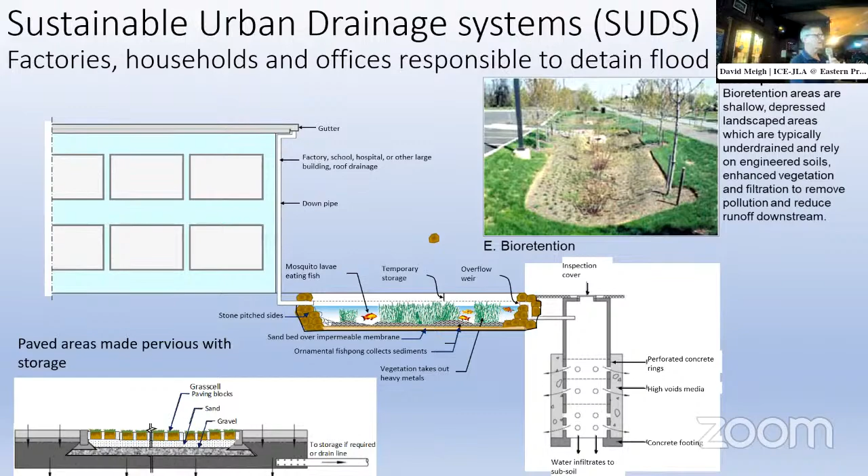So I hope all our students here have taken notes, and I hope we will send the presentations to them, and hope that they'll keep an eye on the future when they start work and see how they can specify new materials or nature-based solutions for their projects. Okay, I'm going to hand over to you.

Yes, thanks very much, David. That was a really interesting talk with a lot of very nice ideas, including the occasional geogrid, which of course is nice. Actually, combining with vetiver grass is something I felt was a really good idea, especially if you wanted road embankments to survive overtopping from tsunami. I thought the combination would be good for that as well.